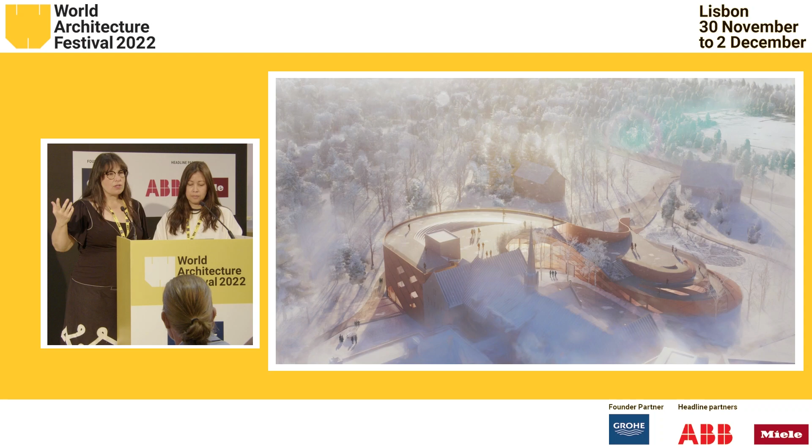You can see the truth of our shared histories. You can see that north direction sharing knowledge, and you can see back to our origins, seeing the water. So that positioning of the bear as a massing pattern for the building is really important.

And the fact that once you enter the building, you're under Mukwa's protection. It's also an important part of creating a place of safety after you have this really intense encounter with this former residential school, which honestly they were really death camps for children. They weren't schools at all.

So the next guiding principle that we're following is the 7 directions. You may be familiar with the concept of the medicine wheel, maybe not, but the medicine wheel is a diagrammatic interpretation of a philosophical stance that represents the interconnectedness of all life systems and our interdependence on one another. If you talk to any Indigenous elder, they'll have new things to say about all the teachings to do with the medicine wheel.

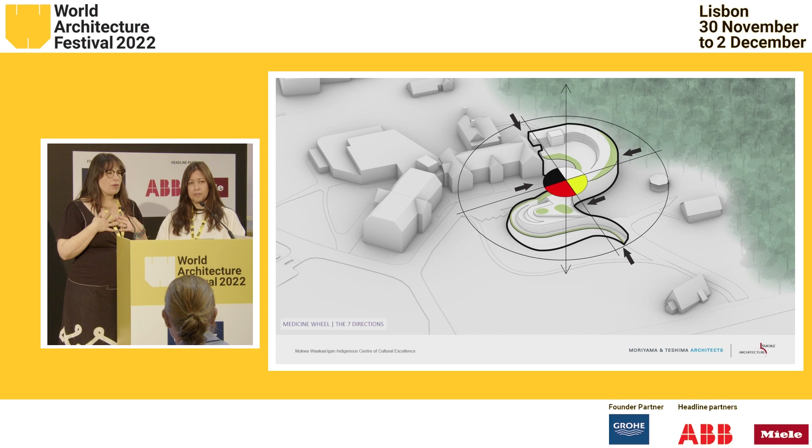But the building is careful to honor those teachings concerning the cardinal directions, the teachings concerning our connection to sky, the direction of up, the direction of down, our connection to Mukwa, Mother Earth, and the direction of center, the direction of self-balance, and the heartbeat.

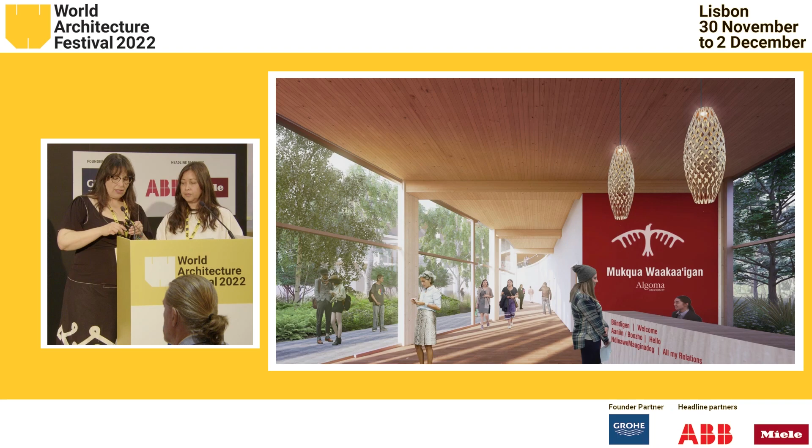This is the east entrance. This represents the beginning of our journey. And as we walk along that journey, we walk up a sweetgrass braid path.

The sweetgrass braid is actually from Saskatchewan. It's a teaching that came to us from one of our student members who comes from Ochapowace Cree Nation. Her teachers told her about the sweetgrass braid being our experience and journey in the present, comprised of our understanding of our ancestors and our shared history, a vision for the future of what is possible, and also the path of the present, the needs of the present day.

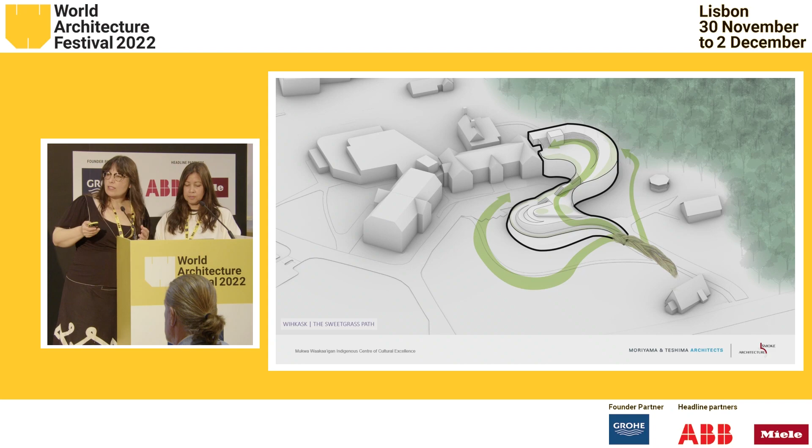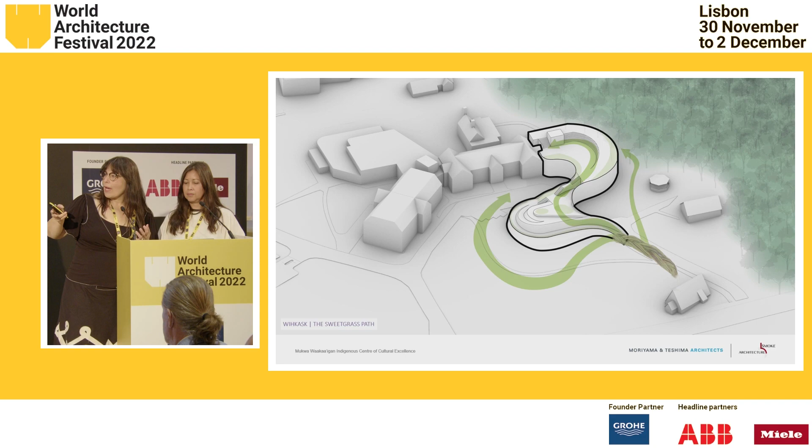As we walk this building, those three paths are evident in how we move through the spaces—encountering Shingwauk Hall, that former residential school, looking forward to a rejuvenated relationship with the forest through outdoor classrooms that are very permeable on the east side, the direction of new beginnings. Then that path forward through the building itself follows the path of Mukwa to the north, the direction of shared knowledge.

Water is where we all came from. It's a feminine element—we all were created from water. Water is another element that we honor in the planning of the building.

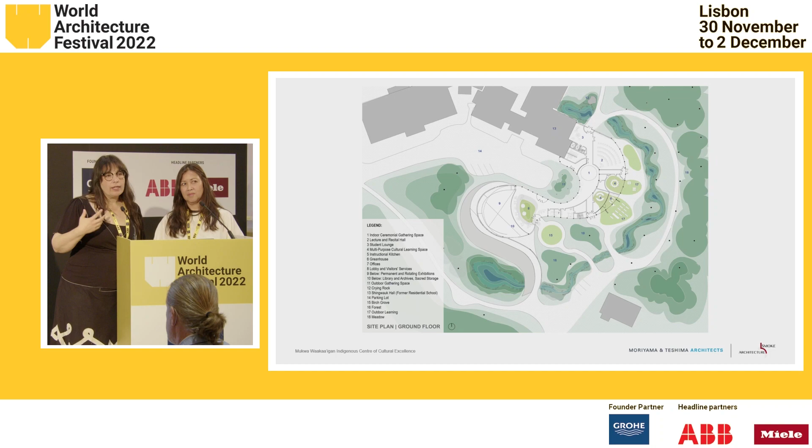Working together with Trophic Design, Terence Radford, a Métis landscape architect, and Eric Claver, another landscape architect—they're fabulous—we marked the path of water through the site and honored it. It actually generated some of the forms of the building and becomes part of that permeable learning environment that is porous between indoors and outdoors.

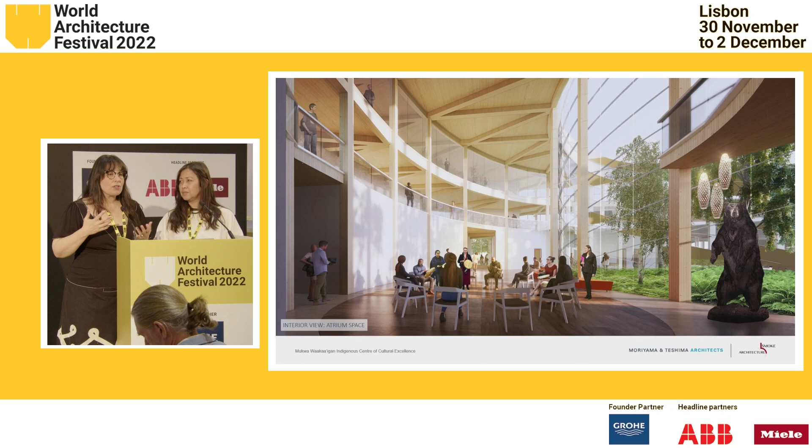The Tikanagan is one of the important patterns we follow here. A lot of mass timber buildings follow a very rectilinear post and beam pattern. Here we use the teachings of the Tikanagan, a cradle board that swaddles young babies and makes them feel safe as though they're still in the womb. This lacing inspires the structure and the features of the cladding, representing our honor for our children.

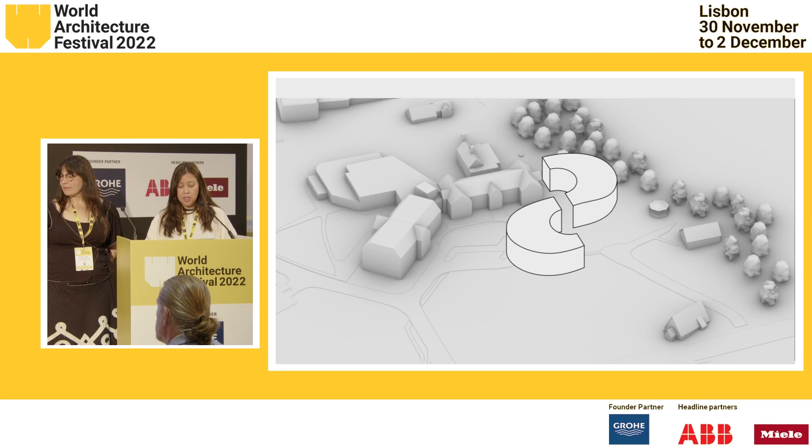The building massing occupies the right-hand side on the screen here. The building is organized into two arcs: the northern arc is the area of teaching, and the southern arc is the area of cultural programming. The site is sloped, the arcs are connected, creating a pathway throughout the building and over top.

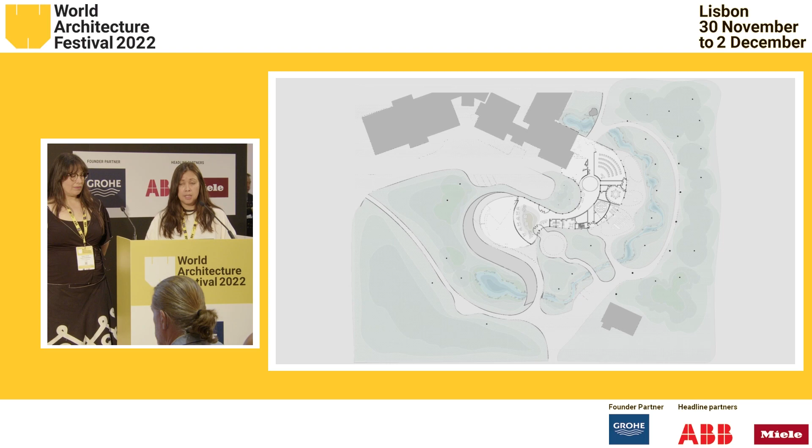An important component of the project is to support land-based learning. A series of outdoor classrooms bordered by a stormwater management stream are reciprocally reflected indoors with teaching spaces, blurring the edge between contemporary learning and traditional land-based learning.

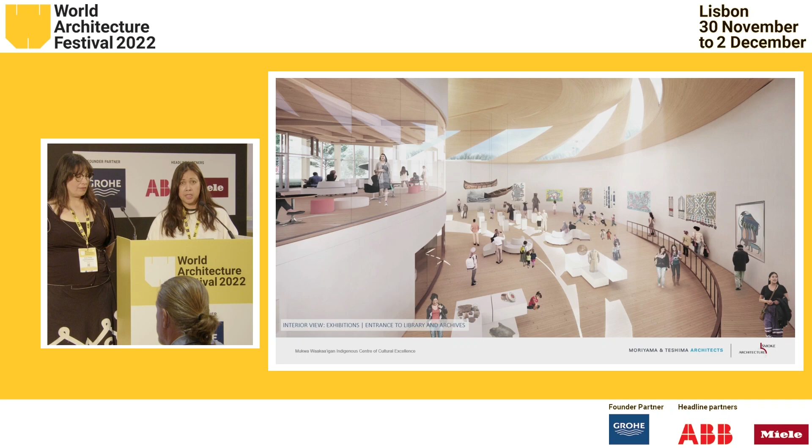The project also has a major cultural component. This building will be the house of not only archives, but the stories and familial records for those seeking to learn about their families and family histories, and it will focus on the survivors of the residential school system.

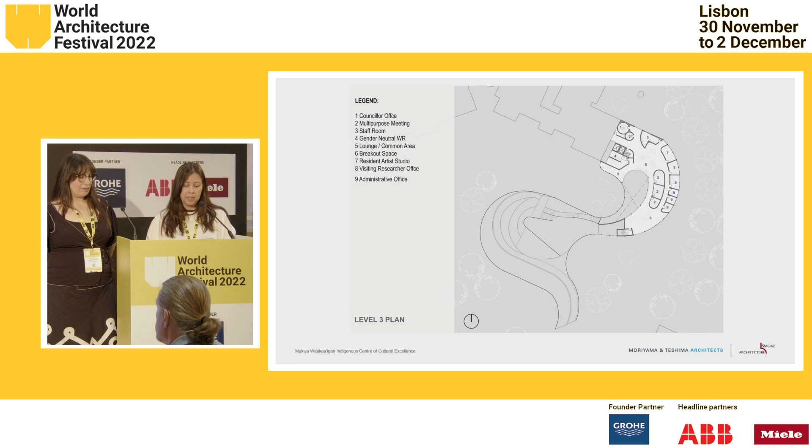The upper levels have more informal spaces for the community, and the third floor has spaces for counseling and wellness, as intergenerational trauma exists today and will continue to exist for generations. This notion of healing not only extends within the building, but Waakaa'igan will also aspire to heal the land.

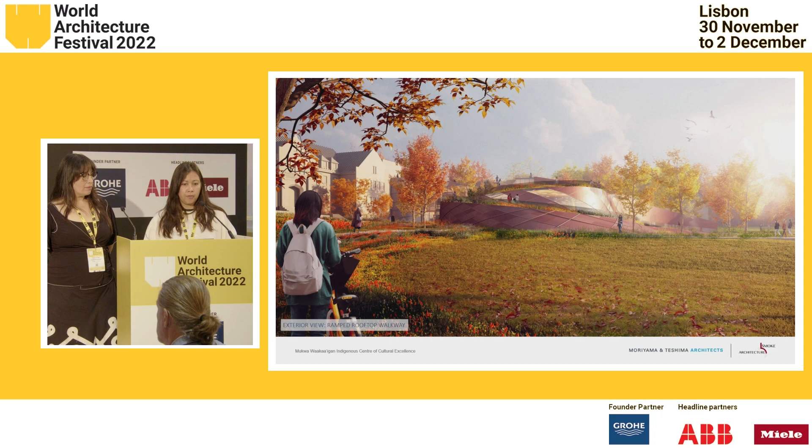Currently, all the green spaces on this university are covered in lawn, but really this is actually a wetland environment. By bringing back the species that were there before European contact, we will bring back the forest undergrowth, the dry and wet meadows, the riparian landscape, and also aspire to tell stories through the planting.

Orange in Canada has become the color of the motto that every child matters. Planted with Indigenous wildflowers in the color orange, these will populate the land, as well as edible plants to remind us of the gifts and our relationship to nature.

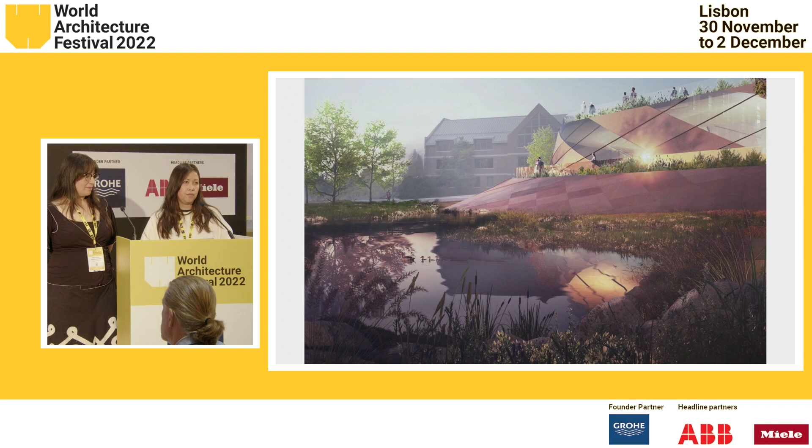This project will not only be a habitat for the human spirit, to grow and nurture the Indigenous community, but also a habitat for all our relations—the plant life, the swimmers, the flyers—and a place of healing for the land and all the creatures in this environment. Thank you.